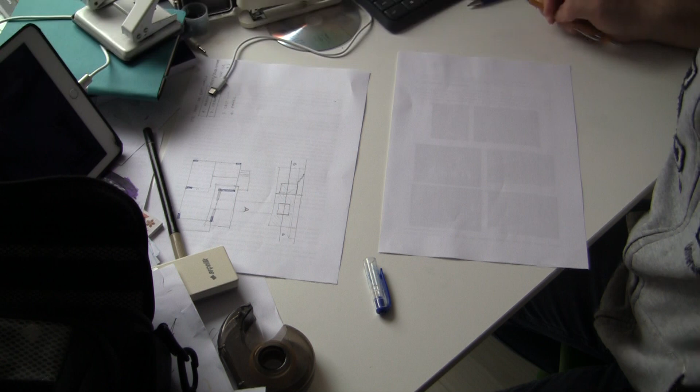Okay, here is the other alternative. We have the same building, ladies and gentlemen. Okay, we are working on the same wall, but now we are going to draw it as a frame wall. So what I will do, I'm going to draw my columns again. I will start by drawing the plan. This time I will try to use my paper more efficiently.

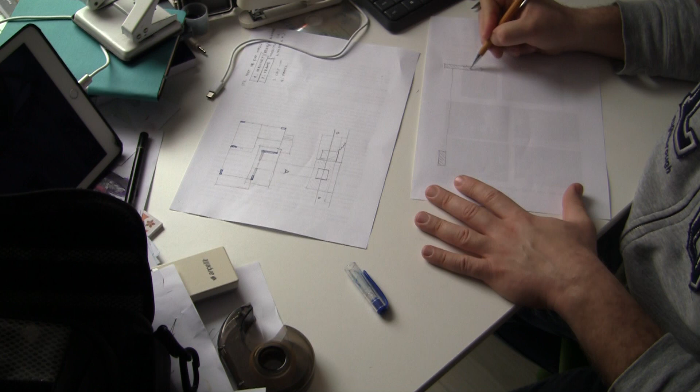I'm going to draw the column here. Okay, and here is the other column, thin and long column there. Okay, and there will be my wall, this point, and this will be my wall opening. Okay, firstly, this is a frame wall,

and frame walls may be produced from wood studs or lightweight steel profiles. We have already talked about these. Okay, so if we choose to use wood studs, we need to have wooden sticks of 5 by 10 centimeters, and the length of them needs to be as high as our wall. Okay, maybe something around 3 meters.

If we choose lightweight steel profiles, we are going to use two types of steel profiles. The first type is going to have a section like this, which we call the lightweight steel C profile. Like that. Okay, this is the C profile.

Okay, and we are going to have the lightweight steel U profile. This is a U profile. Okay, this looks like a C letter, this looks like a U letter. It comes from there. Okay, so let's use the wood alternative. I'm going to say a few words about the lightweight steel profile alternative in the later stage of the video. Okay, so what will we do?

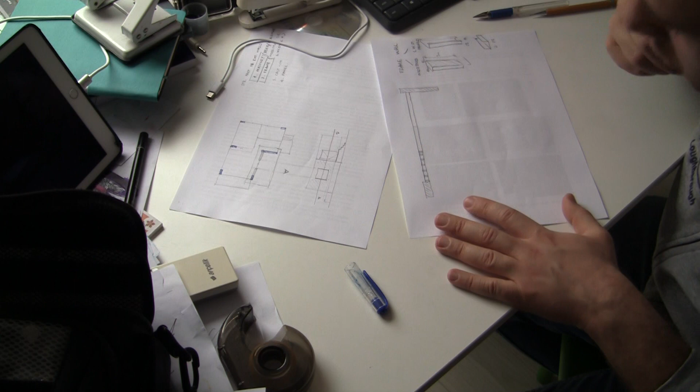We are firstly going to place a horizontally standing continuous wood stick on top of my floor. Okay, we lay it on top of our floor. Okay, and this face of my wood stud is this face now. Over that wood stud, we are going to start putting our vertical studs. Okay, we put them every 40 centimeters. Okay, so the distance between them is 40 each.

Okay, when we come to the window, if 10 is left, that's alright. Okay, just the distance between the final two is 10. Okay, on the other side, we also start putting vertical sticks, vertically standing wooden sticks, every 40 centimeters. Okay, and the final one near the window opening will be placed. It doesn't matter if it is 40 or not. Okay, so 40, 40, 40. Okay, we don't change that 40 dimension, and in the last one, whatever is left.

Okay, and to both sides of our wood studs, I'm going to put X's here in order to make you understand that they have been cut by the section plane like this. Okay, and both sides of the studs will be covered with a wooden board now. Okay, so a new technical word maybe: board. Boards, I define them as surface generators.

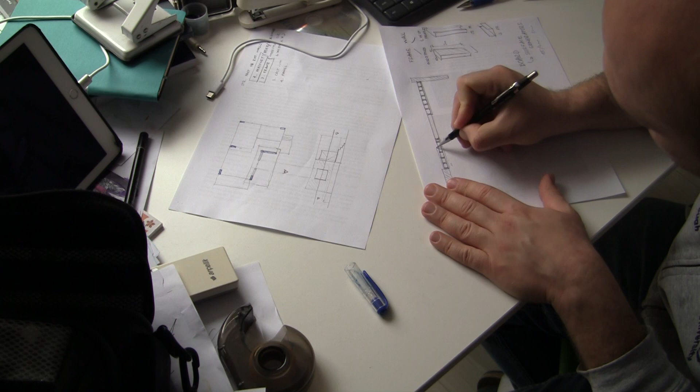Okay, they cover an area of around 1.5 meters to 2 meters, with a thickness of 2 centimeters. Okay, so usually the top flat layer of the desks is produced from wooden boards. We are talking about a wooden board like that. Okay, and on the inner side, we cover our wall with a wooden board also.

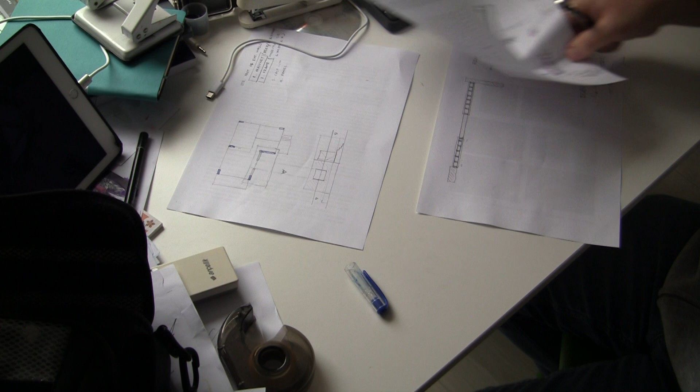Now, I want you to compare the weight of this wall with the weight of a masonry wall. Which one will weigh more? The masonry one is going to weigh more, okay, because we have produced it from an entirely solid body, brick or block, so it is heavy, it is massive. Whereas in a frame wall, these spaces that are left between the studs are empty spaces. That's why when we compare these two wall types, this is very, very light, okay?

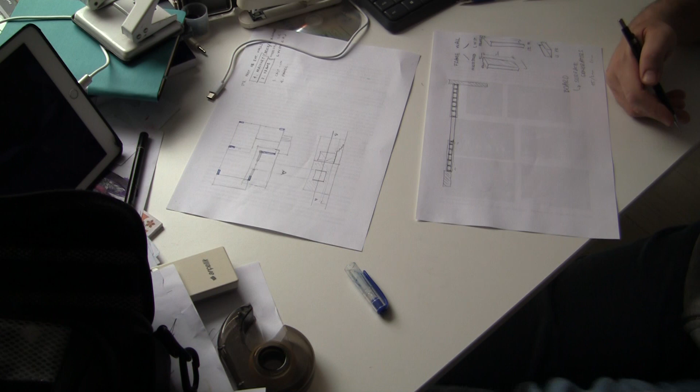And remember the sound waves, okay? In order to stop them, we need to have a great mass. Because sound waves have an energy in their body, and if that energy finds a place which is light, they are going to vibrate that light thing as well. So the sound-related performance of this wall is naturally very bad. So what we need to do, we need to better it. So how are we going to better it?

We are going to use an acoustical insulation, and that acoustical insulation is glass wool, a special type of glass wool blanket, a soft layer of glass wool, and we are going to use it as a sound insulation material. This is a soft material like a real blanket that we use in our beds. So what will we do?

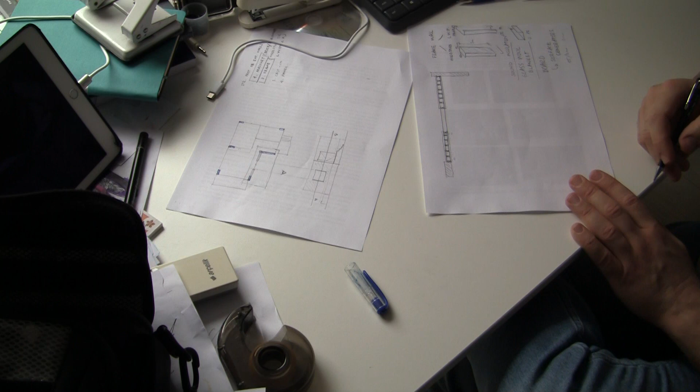Okay, let's draw it colored. Okay, we are going to fill these spaces with sound insulation material, which is glass wool blanket. Of course, we place them before we cover the sides of the vertically standing studs with our boards.

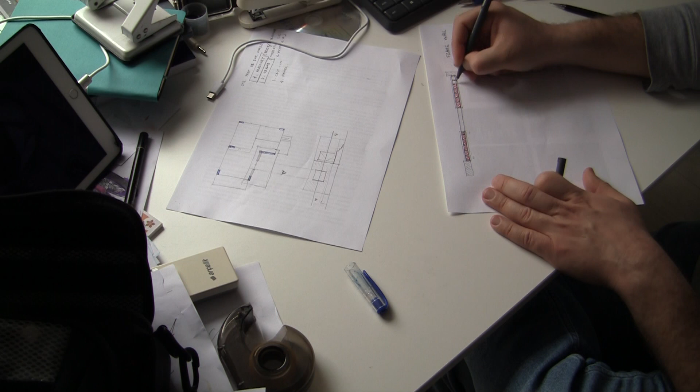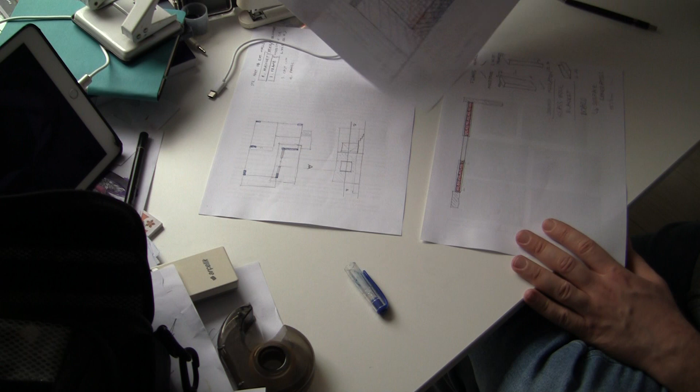Okay, like that. Now its acoustical performance is alright. What about its thermal performance? So the acoustical performance of this wall and that wall, masonry wall and a frame wall, is equal now. What we need to do, we need to make their thermal performance equal as well. In order to better the thermal performance of this wall, we add thermal insulation. We are going to add the same thermal insulation for this building as well.

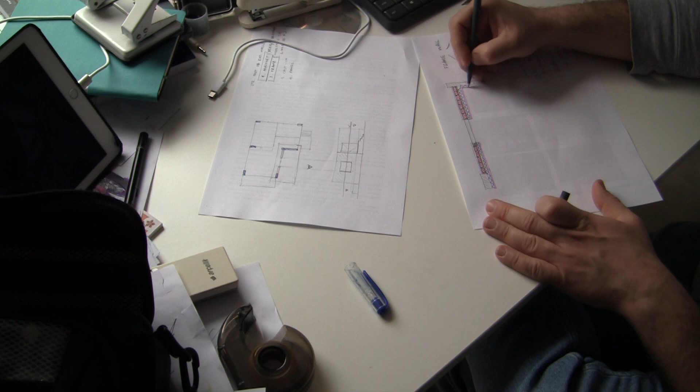Okay, what will we do? We are going to cover the entire wall with it; it continues that way as well. And then of course we are going to apply, with red now, thin layer plaster and we are going to paint it. To the inside, we are just going to apply paint. We are going to apply paint here.

Okay, let's write the names of the layers from here. The outermost layer is thin plaster plus paint, and then we have got thermal insulation, and then we have got wooden board, and then we have got acoustical insulation, sound insulation. I'm going to write a note here: the acoustical insulation is in between the vertical studs, vertical members of the frame. And then we have got again wooden board plus paint.

Let's write the thicknesses. This is 0.5 centimeters again. Thermal insulation is 5 centimeters. Wooden board is 2 centimeters. For the acoustical insulation, we are filling the entire space between two studs with insulation. So if this depth is 10 centimeters, the acoustical insulation is also 10 centimeters, and the inner wooden board is an extra 2 centimeters. Okay? And now I'm going to draw my elevation.

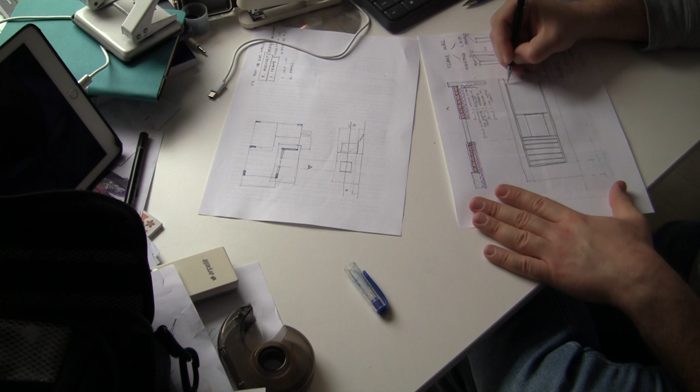At the lower level, I first place a horizontally standing wooden stick, and I put another one right under my ceiling, and in between them I start putting my vertically standing boards. I'm going to continue putting them on the other side of my window opening as well, like this.

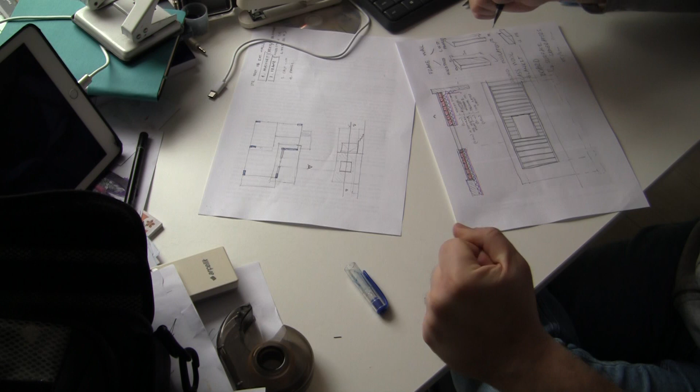Under and over the window opening, I'm going to put again horizontal members like that. The same with these. And over them I'm going to again put vertical studs every 60 centimeters, like that and like this. So this is my frame, this is the skeleton, like the skeleton of a human. And in between the studs at these points, I'm going to fill them with acoustical insulation.

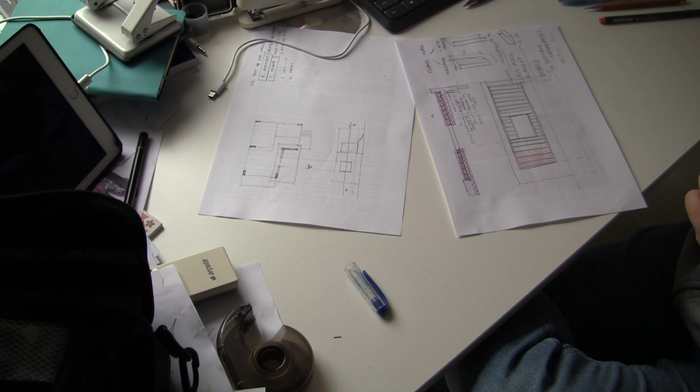Over the acoustical insulation, I'm going to cover it with a wooden board. I'm going to draw the wooden board like that. This is the wooden board part. Over the wooden board, what do I do? I cover the entire wooden board, and also the columns, and also the forehead of the floors with thermal insulation, and I continue the thermal insulation over the plinth wall as well.

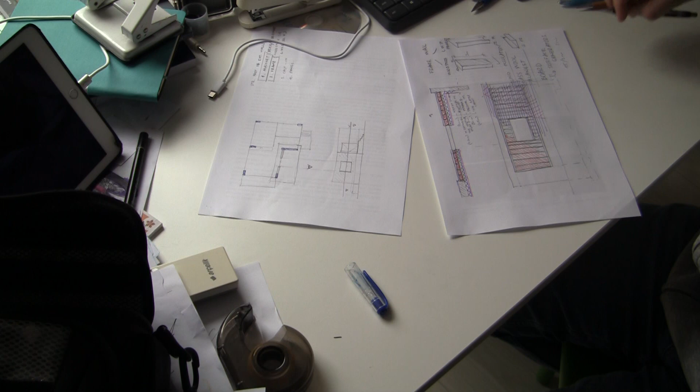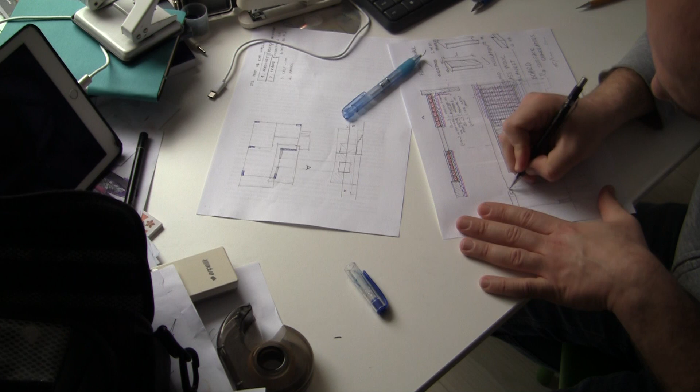Over the thermal insulation I apply thin layer plaster and paint. Okay, and very quickly let's draw a section. This is my plinth wall. This is my column in the background; the column continues down like this. Let's say that this is my hollow slab floor. It continues like that. This is a separate drawing here, a section drawing. And this is my floor-on-ground type of floor.

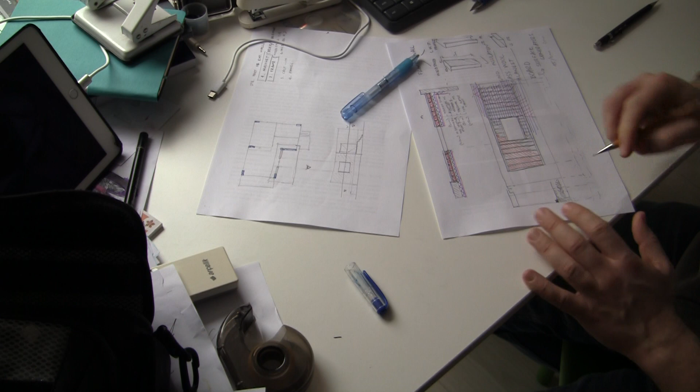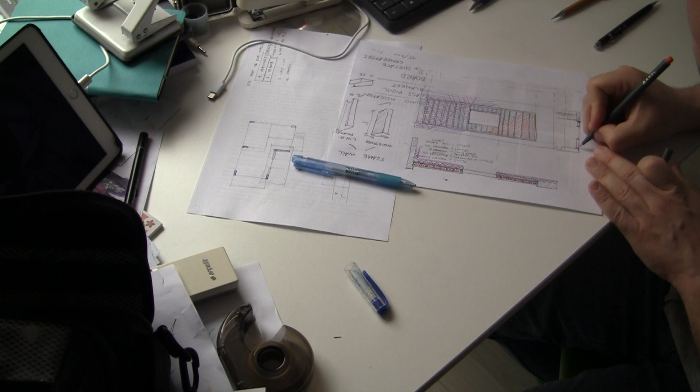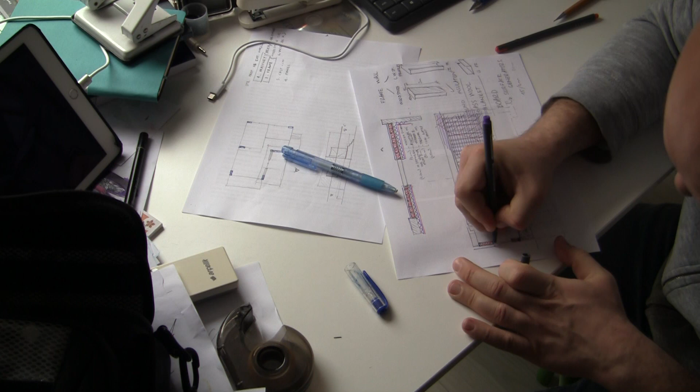What do I do? I place my 10 by 5 horizontal sticks like that. On the window opening part I put again horizontal sticks, and in the background I see the vertical sticks like this, and in between them these spaces are filled with acoustical insulation. On both sides I cover it with a wooden board like this and like that, and then, here's my purple, I cover the entire wall with thermal insulation, and finally I finish it with thin layer plaster plus paint.